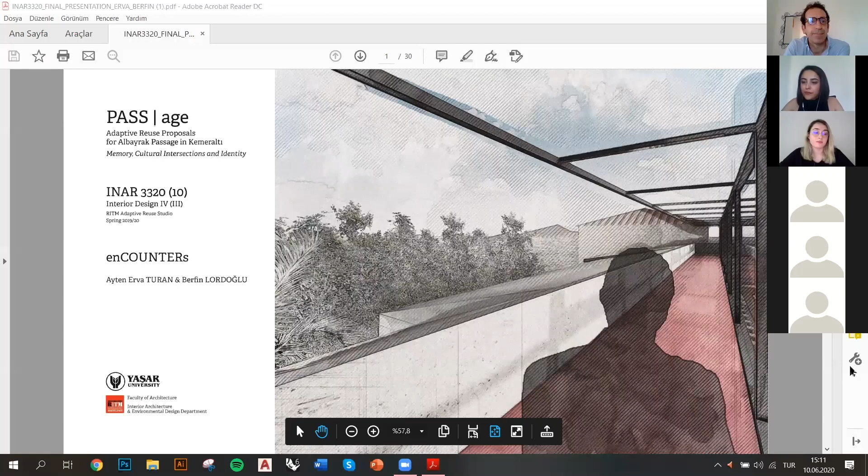As already remarked during the introductory session, one of the greatest values of Albayrak Passage is its urban context and socio-cultural environment. On the southern side of the building is Havra Street, a strategic commercial access for the Kemeraltı District. The major characteristics of Havra Street are its vitality, the intense flavor of local gastronomic products, the voices of vendors, and the constant flow of local and visiting people. On the eastern side of Albayrak Passage is 937 Street, which, compared to Havra Street, is a much quieter and more intimate urban connection.

Here is where a synagogue stands, one of the nine synagogues composing the Jewish cultural heritage cluster of the Havra District, recently restored. The combination of all these elements makes the location of Albayrak Passage absolutely extraordinary and unique. At the same time, the uniqueness of each of the two access points to the building needed to be considered during the evolution of our project proposal.

Our project approached the two entrance spaces of Albayrak Passage differently, relating to Havra Street and 937 Street through different functional and design strategies. Major spaces for social encounters and consumption were located on the eastern side of the building, due to its more intimate profile, with the intention to promote interaction between indoor and outdoor spaces. The major indoor space for social encounters was positioned at the intersection of the two circulation axes, in order to keep untouched the original character of the building threshold located on Havra Street.

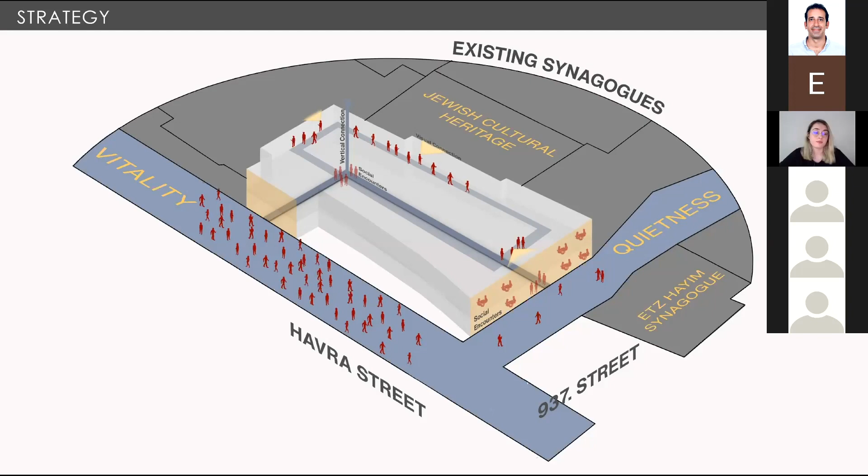The absence of spaces for social encounters in the existing configuration of the building was an important aspect in defining our design strategy. Spaces for social encounters are extremely important for creating a mixed-use program, and they promote experiential goals in social and cultural terms, as well as contrasts such as old-new, stationary-movement, passive-active experience - all relevant intentions in determining the new functional distribution of Albayrak Passage.

The new program for the building includes spaces for gastronomy, informal working, commercial activities, spaces for professional education, all connected by free spaces for social interaction. As previously mentioned, the distribution of these functional areas was achieved through the analysis of the building context and the evaluation of the original layout of the building.

While social areas are generally located in close connection with the building entrances and linked by the major horizontal and vertical circulation axis, informal working areas and commercial spaces are mostly attached to the system of circulation, and social spaces on the Havra Street side due to its great vitality. Centrally, spaces for gastronomy define a new crucial zone where a blend of local flavors reflects the character of Kemeraltı.

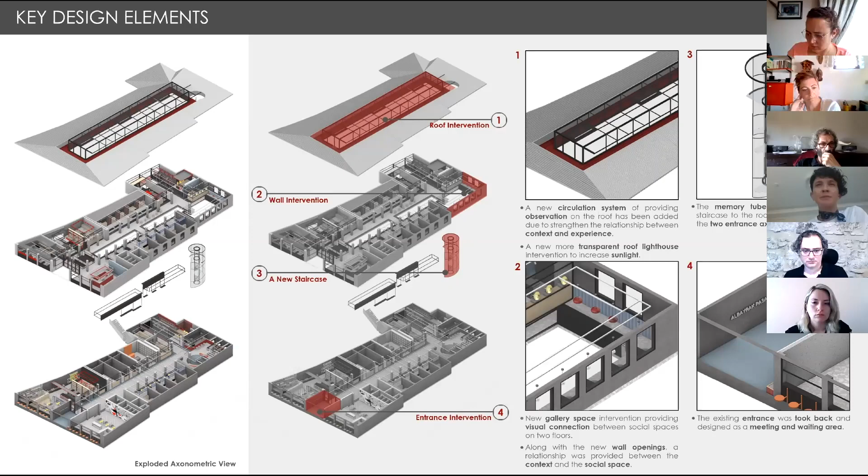The redefinition of the entrance gate located on 937 Street allows the creation of a more protected access point where people would gather or wait for one another.

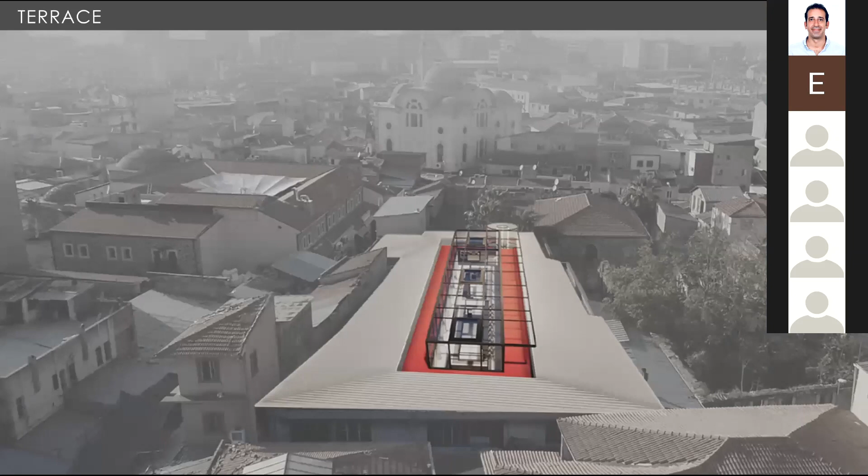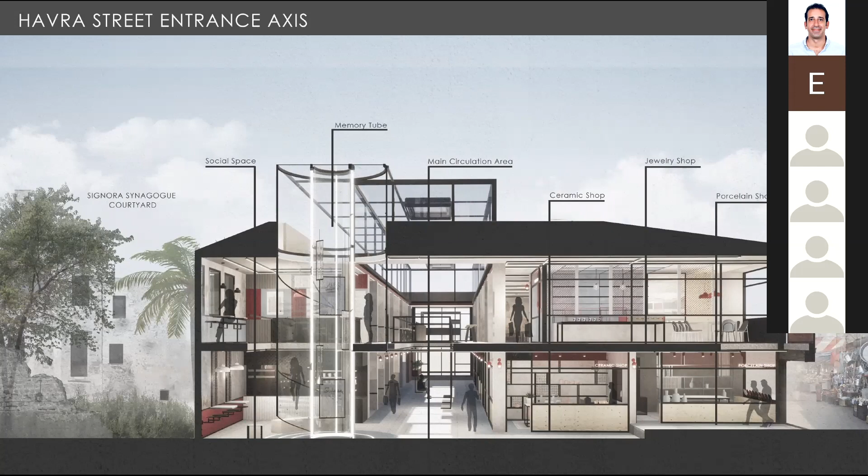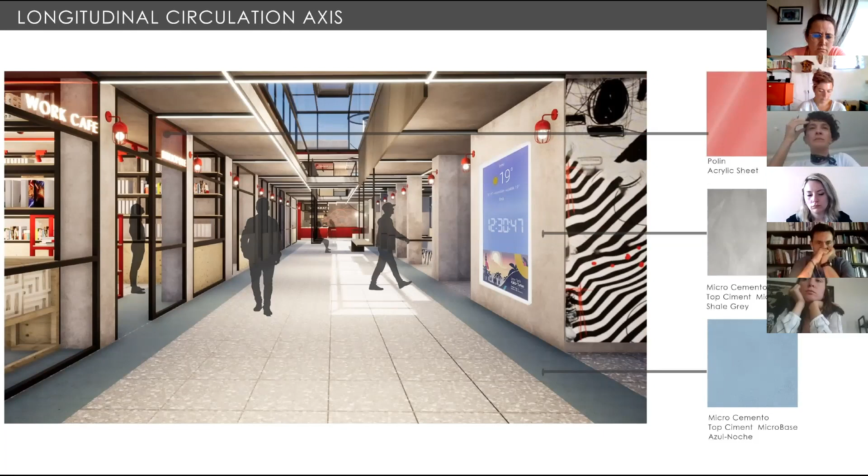This perspective view shows the longitudinal circulation axis in its new design. The character of the space is unchanged, with the lateral position on both sides of commercial and gastronomy spaces. The central gallery connects visually with the upper level and allows natural daylight to illuminate the corridor.

In relation to the materiality, existing terrazzo tiles are retained, but framed laterally with linear contrasting stripes made of colored polished concrete in order to emphasize the edging border between circulation and commercial spaces. The vitrines of the shops are redesigned using metal frames, and all signages are proposed as neon works, composed of light letterings. Five additional metal framed elements create sitting units, marking the verticality of the space.

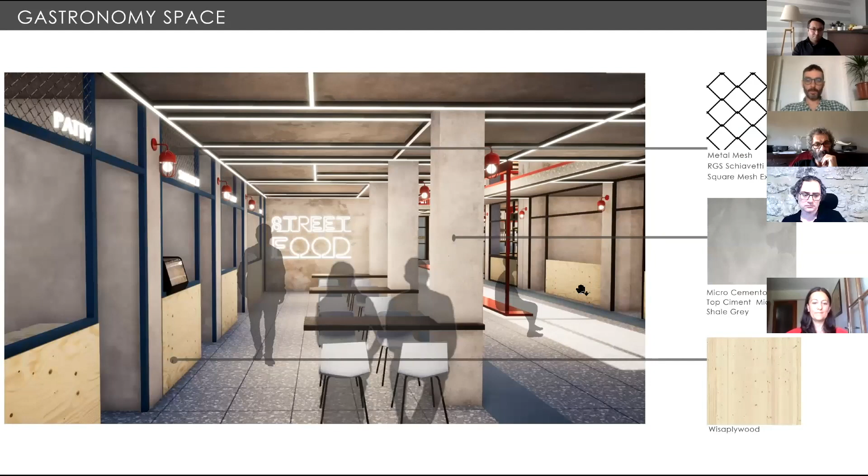In order to emphasize the unity of the space in relation to the gastronomic purpose, we propose the application of artificial lighting linear elements, which ideally link both areas while marking the gradual structural system of the building. Storefronts are here characterized with an additional feature, a metal mesh positioned behind the signage.

Moreover, we don't propose for this side of the building any integration between outdoor and indoor spaces, apart from the entrance gate.

This perspective view shows the circulation axis starting from the Havra Street entrance gate in its new design. As previously mentioned, we intend to locate on this side of the building a sequence of commercial activities, reproposing a pattern of artisan shops typical of the Kemeraltı region, but with a new design appeal.

The contrast between grocery and food shops generally characterizing Havra Street, and artisan shops located at the entrance of Albayrak Passage, would reinforce the shift in the commercial character of the building.

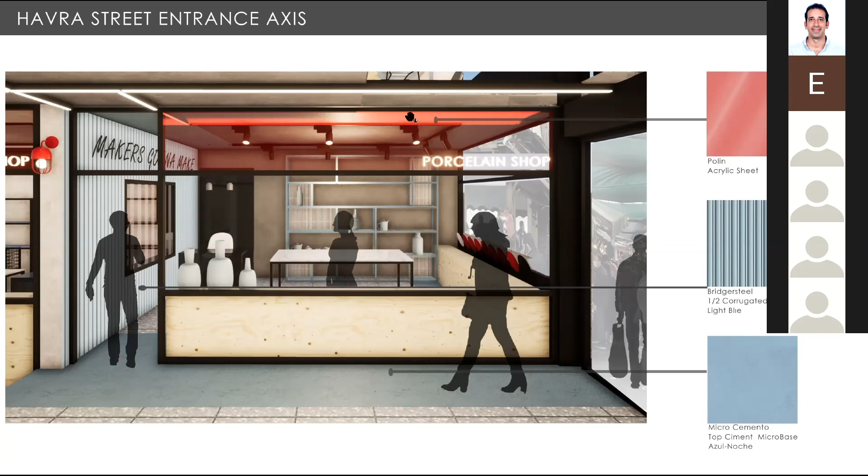Here is a sample, a porcelain shop. And here is the opposite view with a different commercial space for glass products.

This perspective view shows the intersection between the two circulation axes of the building, originating in 937th Street and Havra Street. The project proposes the creation of an indoor plaza, a space for social encounters and consumption, a strategic indoor meeting point for the visitor, and the initial point of a vertical journey which connects the ground level and the first level of the Albayrak Passage by a new stairway, designed as a vertical glass tube.

A gallery surrounding the stairwell connects visually both levels of the plaza.

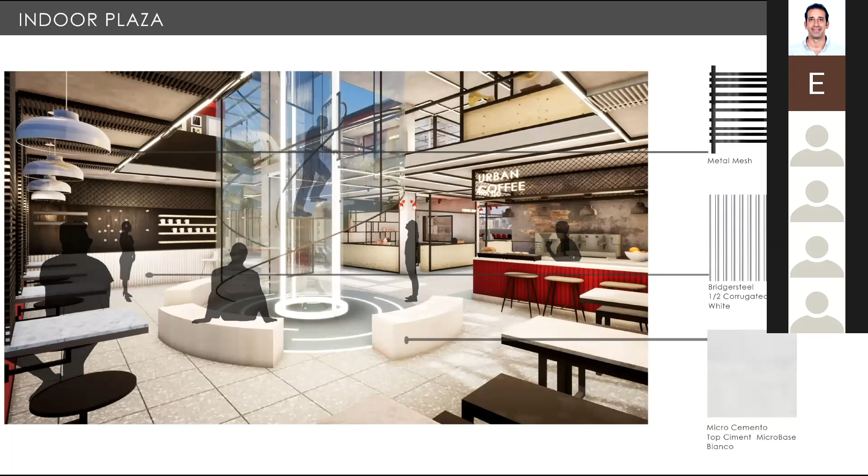Here is another view of the plaza, where we can identify this intersection point of the two main circulation axes at the back, the cafeteria on the left, the glass cylinder connected with the upper levels, and the gallery around it.

In this view, you can see the arrival point of the new stairway at the first floor level. The large gallery space surrounding the cylinder is here framed by additional spaces for social interaction and informal working areas. Large openings visually extend the indoor spaces across the boundaries of the building, allowing the view toward the buildings composing the Jewish Cultural Heritage Cluster.

This render shows the main circulation axis of the building on the first level, visually connected with the lower corridor through linear gallery spaces and highly naturally illuminated through the linear skylight enclosing the space from the top. Here again, spaces for gastronomy are located on both sides of the axis in combination with other commercial spaces.

The project intends to increase the quantity of common spaces on the first floor in order to promote higher visitability and longer permanence of visitors. You can see the main circulation area of the first floor, roof, lighthouse, and skylight on it.

The railing design, created of planes and lines working as a table and sitting units, has been inserted into the gallery spaces, giving a quieter character to this level and a higher degree of brightness.

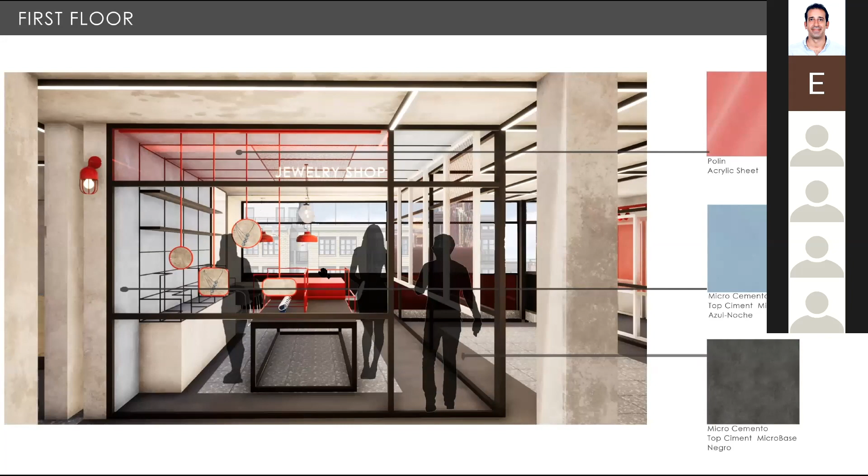Artisan shops are located on the first floor as well. Here is a sample for handmade jewelry products. And at the back, large openings visually connected with Havra Street.

This perspective view shows how spaces for gastronomy are arranged along the longitudinal axis of the building on the first floor, similarly to what is proposed for the lower level, by recessing the storefront of the existing commercial units.

Here is one more cafeteria space located on the first floor and visually connected with 937th Street, in continuation with the character of the building on its eastern side.

As mentioned during the introductory session, Albayrak Passage was previously characterized by the presence of shoemakers. The project intends to retain the memory of shoemakers by proposing the integration within the building program of space for professional education related to shoemaking and accessories, a sort of permanent workshop where interested users would gather to acquire new professional skills, in addition to already existing public programs for professional education located in the city of Izmir.

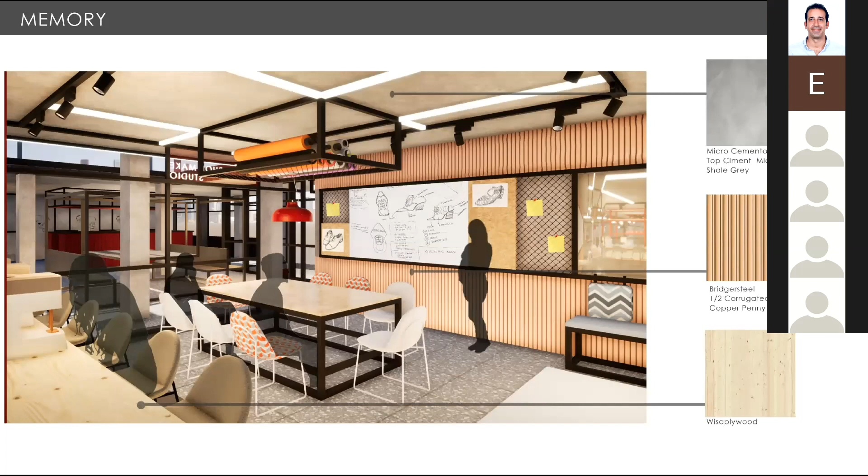This closing slide shows a view of the terrace level. And here is where our journey throughout our project proposal ends.

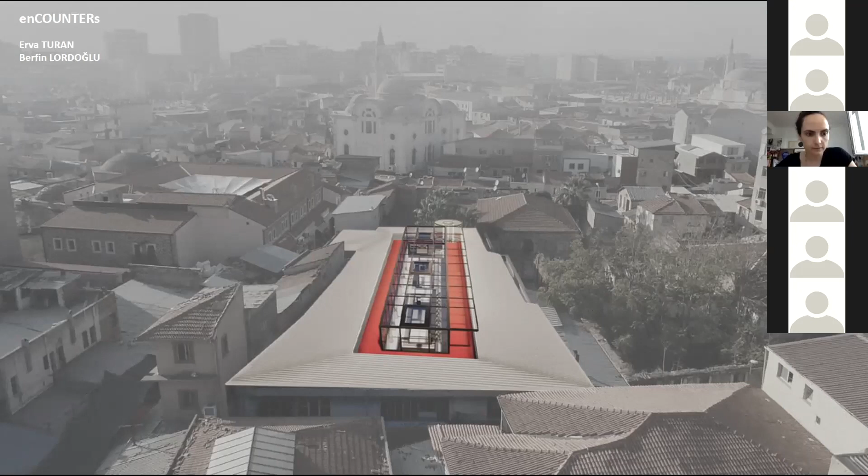Okay, we considered it just as an observing point, seeing the synagogues around here and making the visual link between the user and the urban context. So we just want to add a new circulation system, a third one, so they can observe the context. This function does not exist in the current situation of the passage. We added a new value like that.

Actually, I also found it a very interesting contribution of yours to the building. And now, after this question, quickly my comment would be — I think it even promises more. Therefore, I asked the question.

My quick suggestion would be: what they see from that viewpoint — we can already get a grasp of it from this render. But I would suggest you also depict, maybe with a render or any kind of illustration, showing us the kind of life there, what's going on there. Because in my opinion, it promises much more than just being a viewpoint.

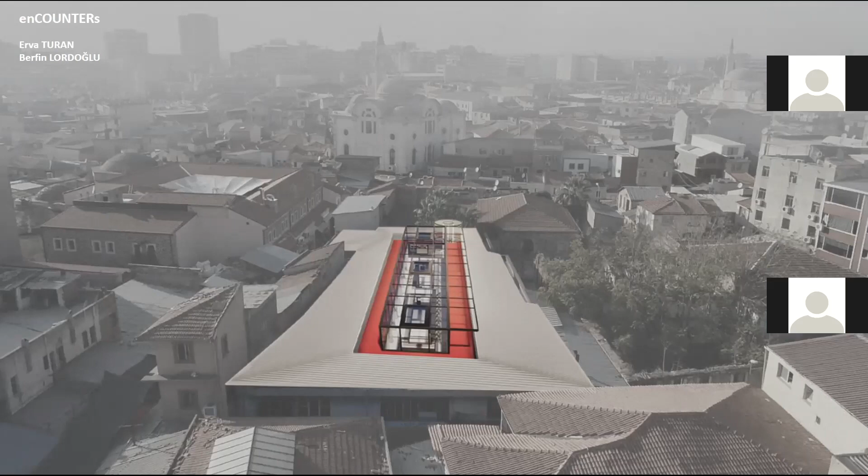And in fact, designing this building in real life, we have these ventilation or sunlight problems in real life. We are planning to put, unfortunately, the air-conditioned units around that terrace circulation area because we don't have any other place. And the openings on the roof walls, the original ones, are so important. I don't see those in this design to ventilate the building naturally, and that's another issue, up to me.

That's all from me at the moment. Thank you, thank you for your comments.

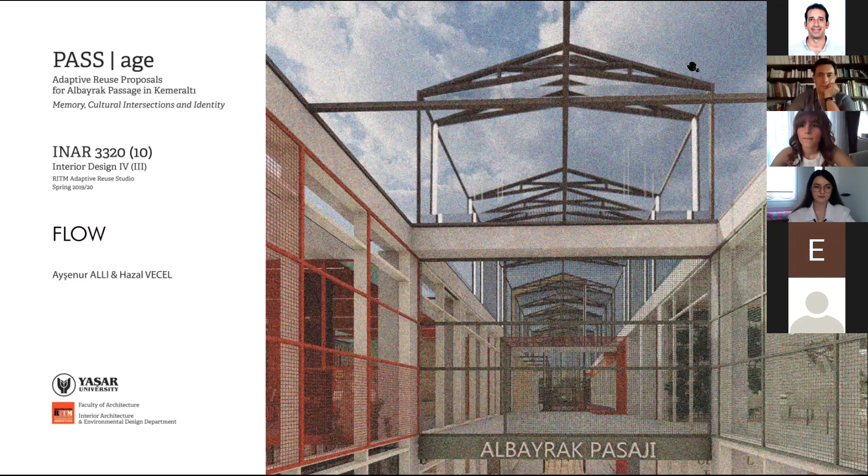As already mentioned during the introductory session, Kemeraltı is the heart of the city of Izmir. It is a large open-air bazaar offering a great variety of diverse experiences for shopping, gastronomy, and culture. In this slide, we also wanted to mention once more that our project site is unique, given the fact that Albayrak Passage is surrounded by a cluster of Jewish synagogues, representing an extraordinary heritage value for the building itself.

Our approach for the project addresses all these contextual values, and it aims at creating an urban hub where traditional craftsmanship, culture, and innovation will merge and contribute to the revitalization of the old shoemaker's passage.

The idea is to highlight the character of the building and urban passage through the creation of two main experiential roads within it: one consisting of artisan shops, and the other representing a journey through the culinary history of the area, characterized by the intersection of diverse cultures. These two roads will promote a new flow of people and experiences in total continuation with the existing dynamics of Kemeraltı.

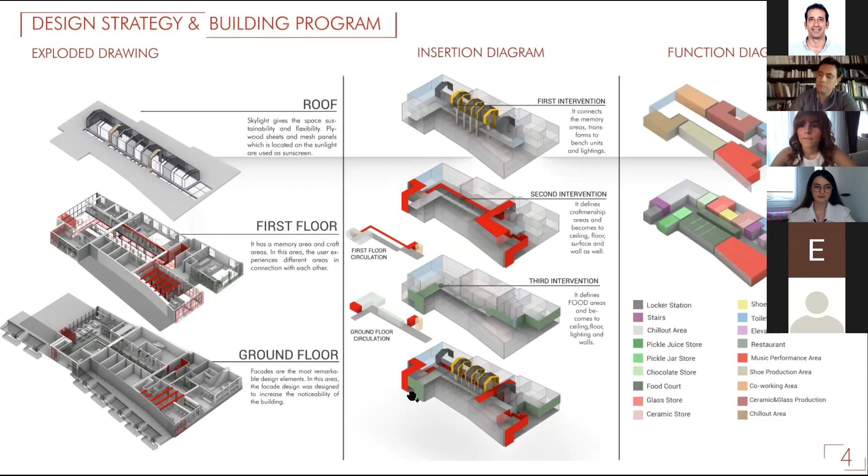Here is the axonometric view of the ground floor, showing the two entrance gates from Havra Street and 937th Street, linked by the L-shaped passage corridor running as the spine of the building. The diagram also indicates the variety of functional spaces distributed on both sides of the spine, and major areas for cultural, gastronomic, and social experiences.

You may notice a large open space visible on the left corner of the building, an area we have named the core. That is the major social space proposed by the project, able to gather a large number of visitors while establishing a great visual connection with the hidden garden of the Synagogue. On the bottom corner, in close relation with 937th Street, the project proposes the integration of a special space for culture and music. We will present these two areas later, together with a special proposal for the passage.

Here is the axonometric view of the first floor, where again a combination of cultural activities and informal working are distributed with the same strategy, based on the alignment of functions along thematic flows indicated in red and green as well.

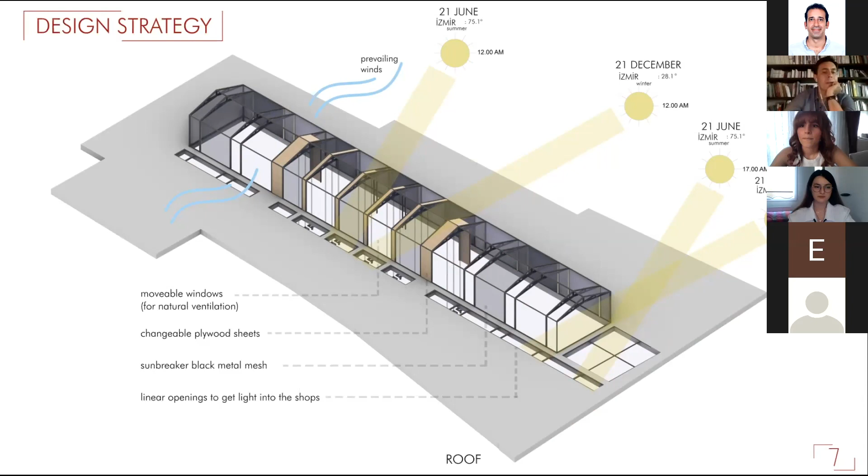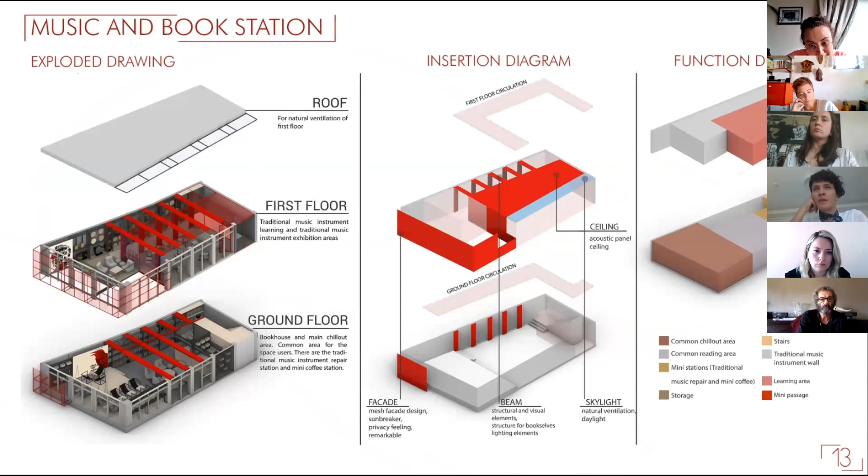Now we are going to present in detail our proposal for the music and bookstore. With the help of three different diagrams, we want to highlight all relevant architectural, interventional, and functional aspects of our proposal, including the facade scheme, the distribution of spaces among different levels, and special features characterizing the design proposal.

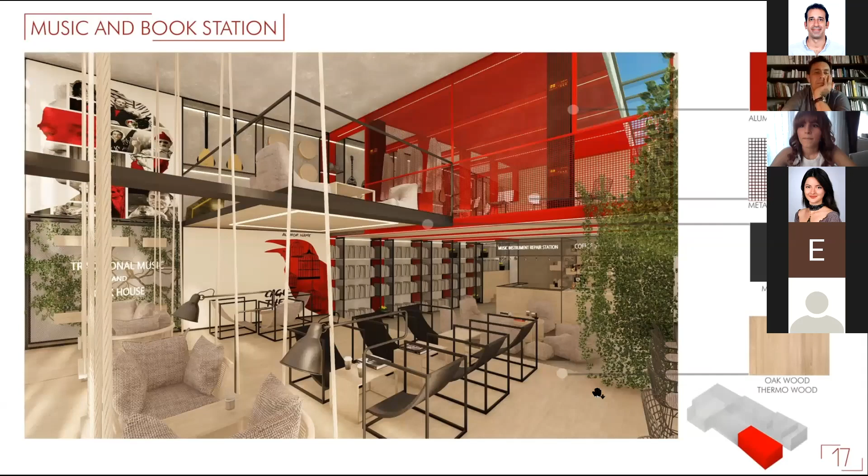This is the first of four internal views of the music and book space. This perspective shows the ground level and the reading area having a double height and therefore totally connected with all other spaces composing the music shop.

Now we want to talk about another important proposal of the project, the one envisioning the redesign of the central corridor of the building, the passage, the major characteristic space of Albayrak Passage.

With the help of three different diagrams, we want to highlight all relevant architectural, interventional, and functional aspects of our proposal.

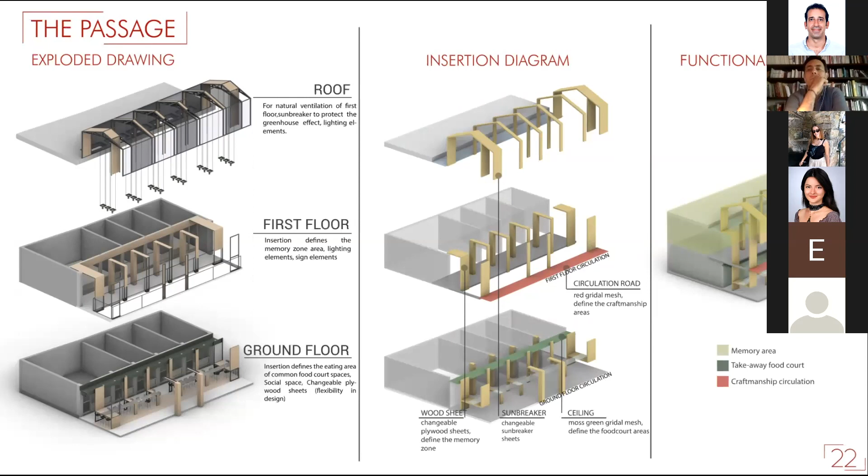Proceeding from the lower to the upper level, a combination of vertically organized elements creates a space for consumption and social interaction on the ground floor, a new circulatory system on the first floor with the aim of emphasizing the shoemaker space and the relation with the memory of Albayrak Passage, and the redesign of the skylight structure on the roof level.

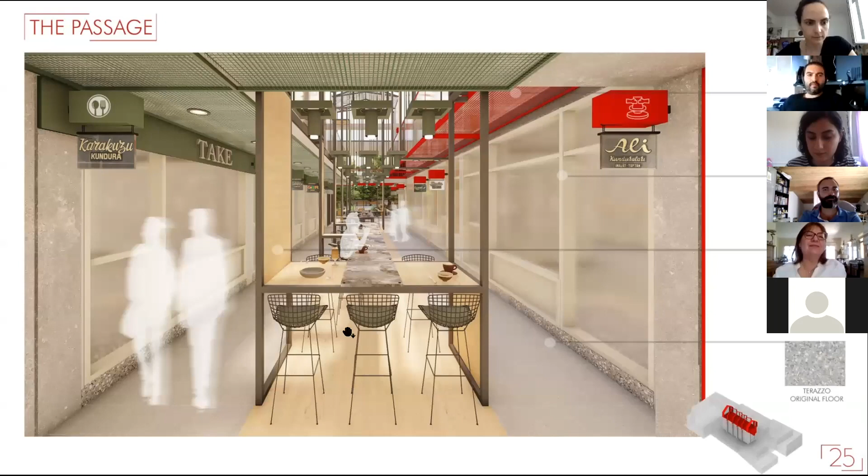Here is a view of our proposal as visible from the passage of the building in its longitudinal alignment. On the right side, a sequence of artisan shops, and on the left side, several spaces for gastronomy. In the center, a linear horizontal plane serves for short-term consumption of gastronomic products and social interaction opportunities, marking the characteristic linearity of the building and greatly illuminated from the skylight. The verticality of the space is also emphasized.

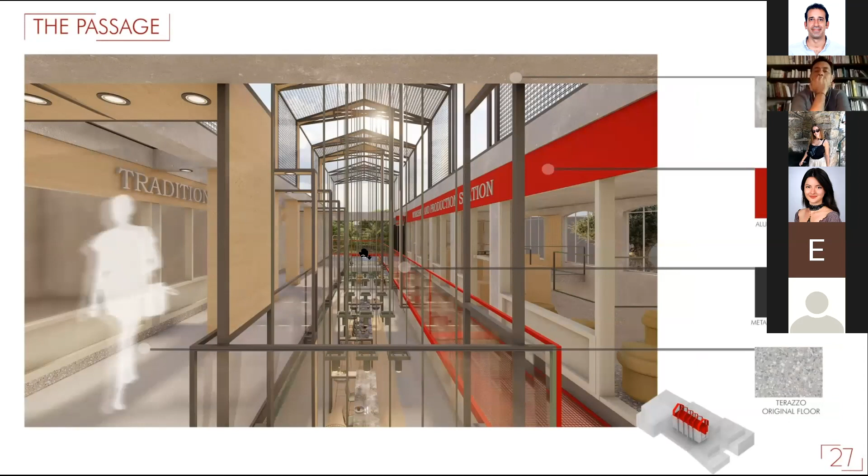Here is another view from the first floor, where the proposal of a new solution for the walkway made of steel mesh panels is visible. The intention is to promote a greater perception of the physical relations among the different levels of the building.

Now we are going to present our last major proposal, which is the core. In order to describe the relation of the core with the building entrance, we want to start our journey from the access point located on Havra Street.

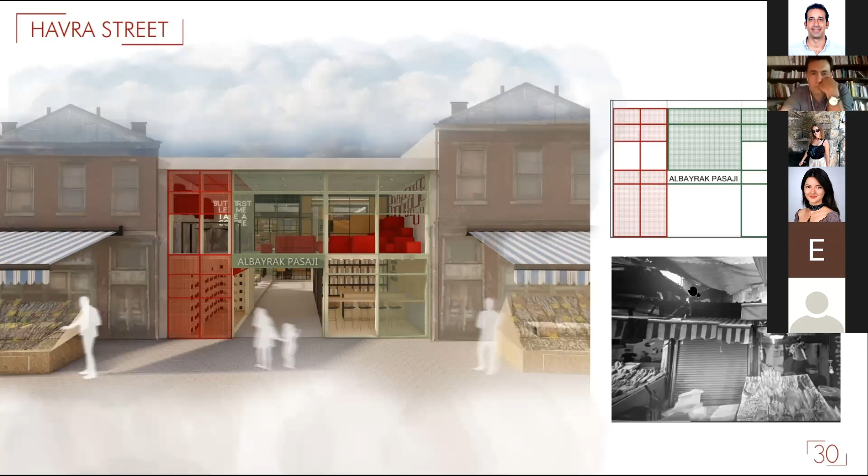The elevation of the building expresses the same language proposed for the other building facade, 937th Street. Here again, we propose a new lightweight skin made of steel mesh panels, colored in red and green as well, somehow interrupting the character of Havra Street and therefore marking the presence of Albayrak Passage, a sort of interpretation of the fabrics utilized in the city bazaar as permeable shading devices. They are applied vertically on the building facade.

Here is the view from the entrance gate showing the locker station on the left and a local gastronomy products shop on the right.

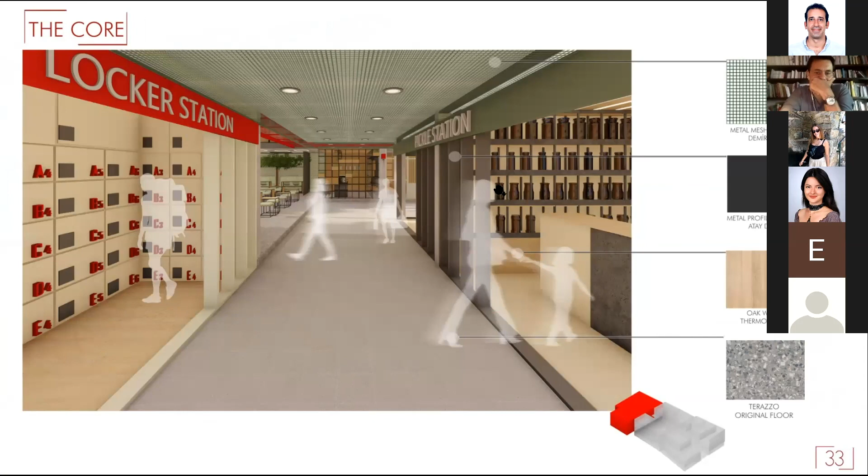Okay, and also we were inspired by the style of deconstructivism, that's why we also chose the red color. You combine it with deconstructivism because red and green, in my opinion, relates to color theory - it's the 50%, in my opinion. I don't remember exactly, but I studied it in the past. Red and green are 50% of the same - I think this equals the combination of that, for example it's a contrast of colors. For example, 50% red and 50% green is similar if you put it on heavily. But if you choose, for example, blue and yellowish, or violet, 30% yellow is equal to 70% of the other. So you could divide the space by functionality - 50% green, 50% red. And for constructivism, for me, more yellow, because yellow, in my opinion... because also red is not a bad color for deconstructivism, but...

Just a question - I think the real answer is they are from Karşıyaka. That's why I didn't want to say it. They both live in Karşıyaka. They wanted to give a Karşıyaka touch to the building, and they put it inside the city of Göztepe. It was a big problem - now people connected from other cities don't know what Karşıyaka is. But anyway, it's the other side of Izmir, the other side of the bay, and they have a typical color, red and green. So please tell the truth - it's not about natural colors. We are from Karşıyaka. Yes, so this is the truth, that would be the answer.

You caught up, Sergio. No, I'm kidding. It's just sometimes we need a mental break. Anybody else wants to address anything?

If I may - yes, sure, Serkan, please. First of all, thank you very much for making me part of this wonderful group of people. It was a pleasure to listen to the presentations before and now as well. Both presentations, I enjoyed the process of development, the architectural language they created, and especially with your project, the use of light and the greenery also grabbed my attention. The outdoor patio area, the plaza area that you created, is also a wonderful space to be in.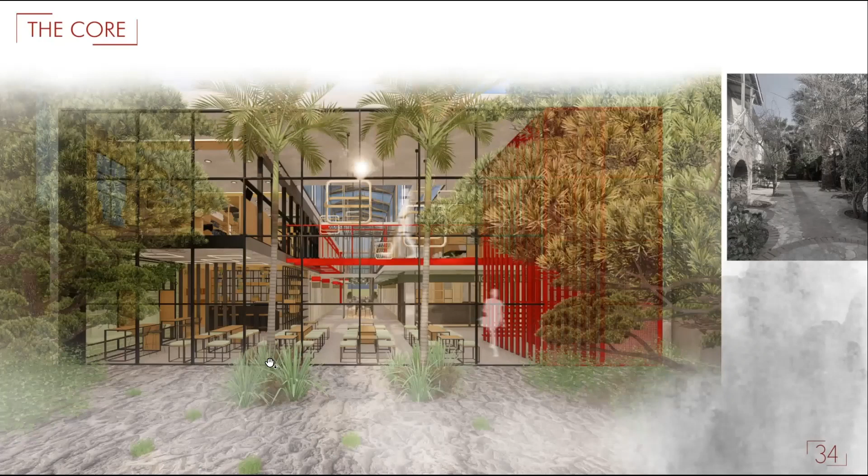Yeah, actually we thought about it before, because Kemeraltı is a very historic place, and we were trying to design a modern place here while also integrating with Kemeraltı. That's why, as I answered before, Serkan Bey, we were trying to keep things simple. Also when we were traveling in Kemeraltı and talking with the esnaf workers there, they always told us it's too boring for them because they're used to going to the same places every day. That's why we want to make new things combined with the traditional things as well.

Yeah, we are trying to combine two things actually, but I don't know if we can show it. We also put the craftsmanship and the food courts at the same place, because people come here to get something, to eat something, and they can watch the craftsmanship and connect with the tradition as well. That is our logic while connecting the past and the new - these are key points.

Yes, I obviously understood all these craftsman ideas and how to integrate them, but I think the collages are maybe too clean - they seem too modern. Maybe not modern, but if you even put a real person into that collage, into that graphic language, it would completely change, I think. So it wouldn't be that clean.

I think you have the idea and the design, but when the graphic is too clean, I question things like that. Even in the image showing the neighboring elevations of the buildings, the graphic was really clear cut. Maybe not a white person, but a real person. I don't know, it's your graphic language, but I think you have the idea, though showing it was a little bit missing. That's why I asked, but thank you for the answer and congratulations for the nice project.

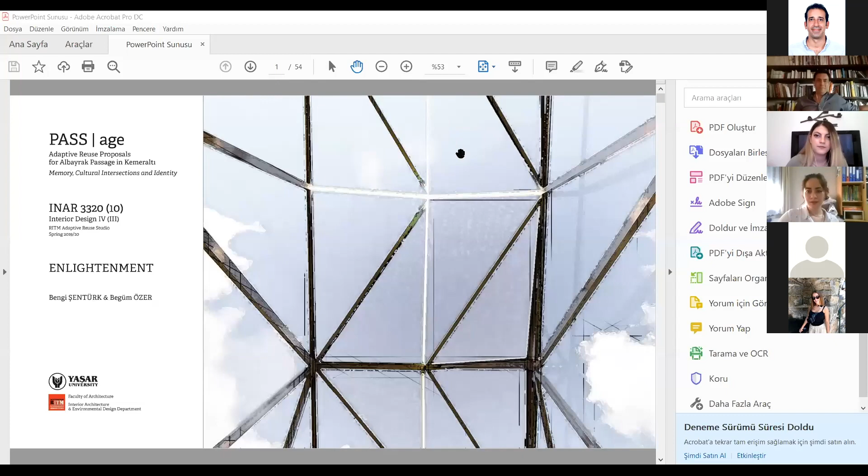As already remarked during the introductory session, one of the greatest values of Albayrak Passage is its urban context and socio-cultural environment. The building is located in Havralar District, which in Turkish indicates the region of the synagogues. Moreover, the building is located in Kemeraltı, the old bazaar area of Izmir. Symbolically, Albayrak Passage, by losing its original function and commercial purpose, had remained in a dark spot for a long while, yet it is surrounded by an invaluable cluster of cultural heritage. Our proposal is to bring the building back to light and to recreate and extend its original character as an urban and commercial passage. Our project title emphasizes this intention. The transition from dark to light is actually an enlightenment process in which both the historical texture of the region and the building itself are revalued.

Sinyora Synagogue, one of the synagogues composing the Jewish cultural heritage cluster, directly abuts Albayrak Passage on the northwest side of the building. The courtyard of the synagogue represents a valuable focus for a visual connection from the inner space of the building. Therefore, a consistent architectural intervention was proposed regarding the northwest elevation of Albayrak Passage and a portion of its roof, creating a continuous three-dimensional transparent volume enclosed by vertical and horizontal glass screens, allowing wider integration of views beside and above the surrounding buildings and open-air space composing the Jewish Cultural Heritage Center. In this way, the rehabilitation and redesign of the skylight structure of Albayrak Passage becomes a major key design element of our proposal. This intervention materializes the potential of the building and increases its contextual value by creating an observation point above Kemeraltı and the Jewish Cultural Heritage Center.

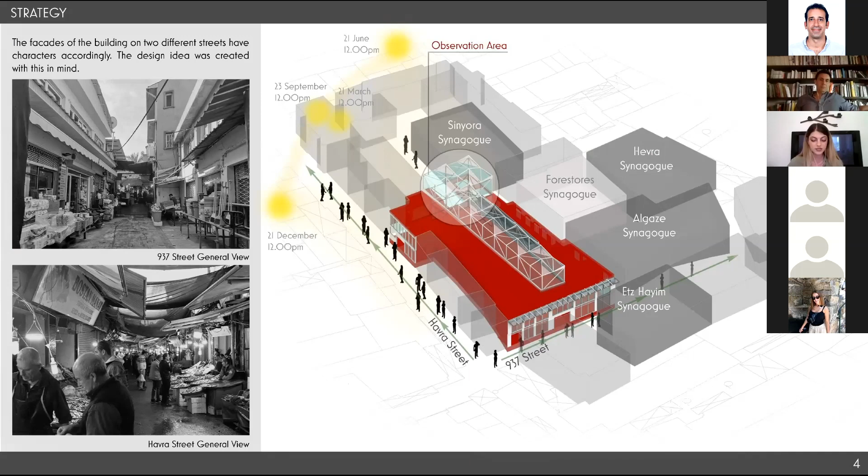As previously mentioned, Albayrak Passage is a commercial building. It represents a symbolic threshold between Havra Street and the Synagogue district due to its location. Two separate access points allow entrance into Albayrak Passage, located at both terminals of the L-shaped indoor passage. These two entrance gates have different character due to being located on streets with different urban characteristics. Havra Street is a vital and dynamic urban axis, constantly filled with people and having a strong commercial character. 937th Street is a side connection, much quieter compared to Havra Street, which in the near future is supposed to become a strategic pathway to reach the Jewish Cultural Heritage Center. Therefore, our project intends to treat both elevations of Albayrak Passage considering these two different scenarios.

Albayrak Passage was built during the early Republican period. It is characterized by the typical grid composition of the facade with large openings. The project intends to propose minimum modification of the original composition, with only the addition of a shading element framing the facade on its upper edge. This perspective view shows the eastern elevation of the building along 937th Street in its proposed configuration. Similarly, this perspective view shows the southern elevation of the building along Havra Street in its proposed configuration, redesigned using the same language as the larger elevation previously presented.

As mentioned earlier, the building is characterized by the L-shaped central passage. Several decisions were made in relation with this characteristic configuration of the layout. The first is to strengthen the passage character of Albayrak building by locating a new social space at the intersection of two axes, with the vertical extension of it in the form of a glass volume that integrates a large portion of the roof. At the arrival point of the major vertical circulation road is the external terminal of the building with the observation terrace.

Another important decision was to protect the commercial character of the inner passage by locating the majority of shops along the central corridor and the ground level, which are supposed to include space for gastronomy and artisan shops. On the right side, you can see how the distribution of all spaces composing the building program are arranged, with the indication of gastronomy areas, shopping areas, educational workshop areas, and shoemaker memory spaces, all linked to separate social spaces distributed on both levels of the building.

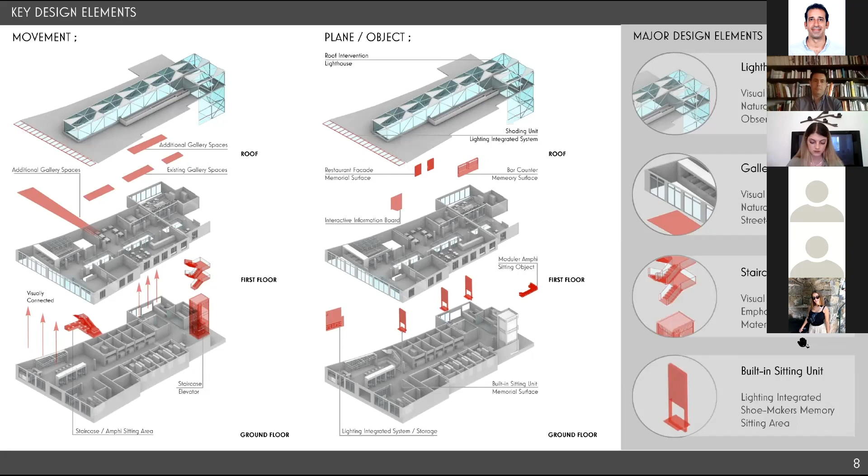The section also shows our draft proposal for the redesign of the skylight, and besides it, on the right side, it is also visible a linear terrace open on the northern side and overlooking the Jewish Cultural Heritage Center. The terrace represents the outer extension of the inner space and additional space for small events and social interaction.

In central position, white metal frames marking the verticality of the inner void of the building create seating solutions and communication surfaces.

On the left side, the section shows the new stairway connecting both levels of the building and ending upward at the terrace floor. The stairways open up upon the major social space in the building, located in the northwest area of Albayrak Passage and surrounded by glazed partitions allowing views towards the courtyard of the synagogue.

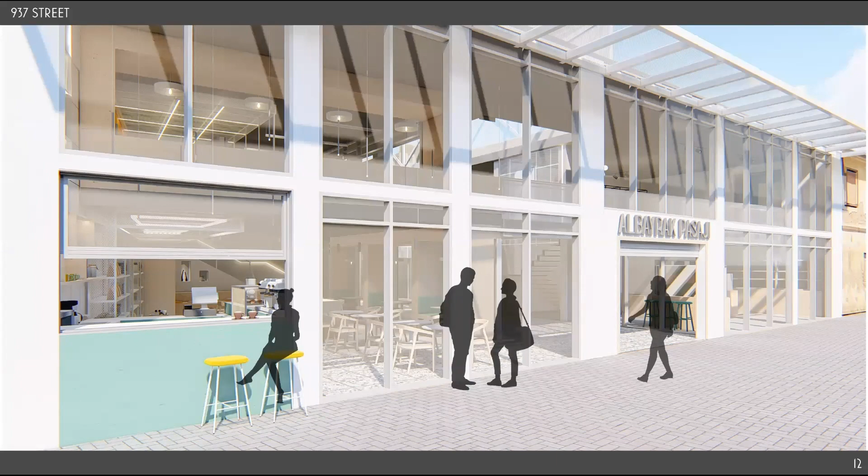This perspective view shows the gallery we decided to create on the inner edge of the building along 937th Street. The gallery connects visually both levels of the cafeteria on the eastern side of the building, doubling the height of the space and increasing the quantity of daylight in this area.

The commercial character of the passage is protected. A combination of artisan shops and spaces for gastronomy is distributed along the major axis of the building, where storefronts are visibly designed by keeping the general composition of the inner elevation. All signage elements have the same character to unify the aesthetic of the passage.

This render shows our proposal for the introduction of white metal frames enclosed with white metal meshes, emphasizing the verticality of the central gallery of the corridor by providing seating solutions for the visitors.

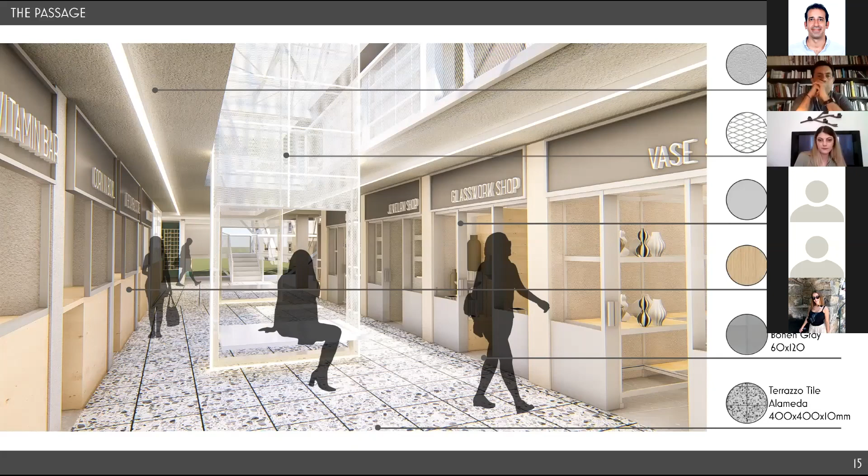This render shows the intersection point of two internal circulation axes of the building, where the project proposes the creation of a large common space for social interaction and small events, all surrounded by a new glass facade system, opening up the inner space of the building toward the courtyard of Signora Synagogue.

An elevator is here proposed in order to connect all levels of the building, with the inclusion of the new level suggested by the project, that is the terrace floor.

And here is the proposal for the redesign of the central circulation space of the first floor, characterized by new balustrades. On the right and left side, a sequence of spaces for gastronomy is visible, with the inclusion of an educational space as well for cooking classes.

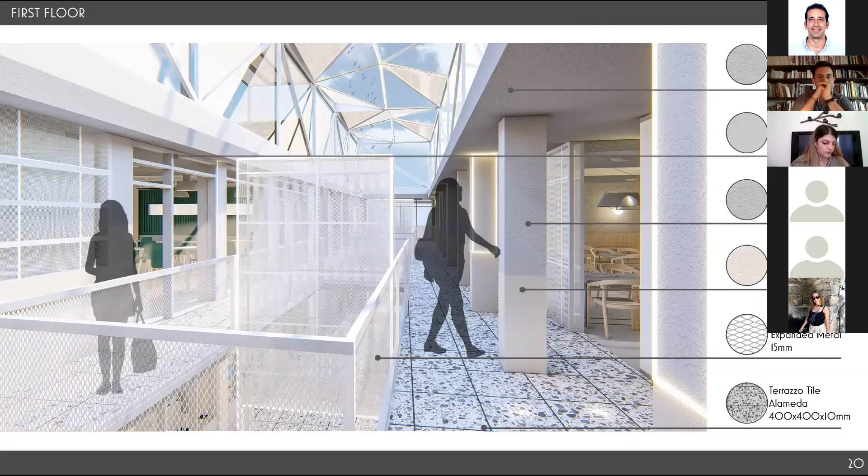And here is the proposal for the introduction of a new floor level aligned with the original roof of the building and reachable via stairway and elevator. This level will allow the view above Kemeraltı and the Jewish Cultural Heritage Center, creating a new vibrant experience for the visitor of Albayrak Passage.

And here is a night view of the first floor circulation space, showing how lighting elements are integrated with the structure of the skylight.

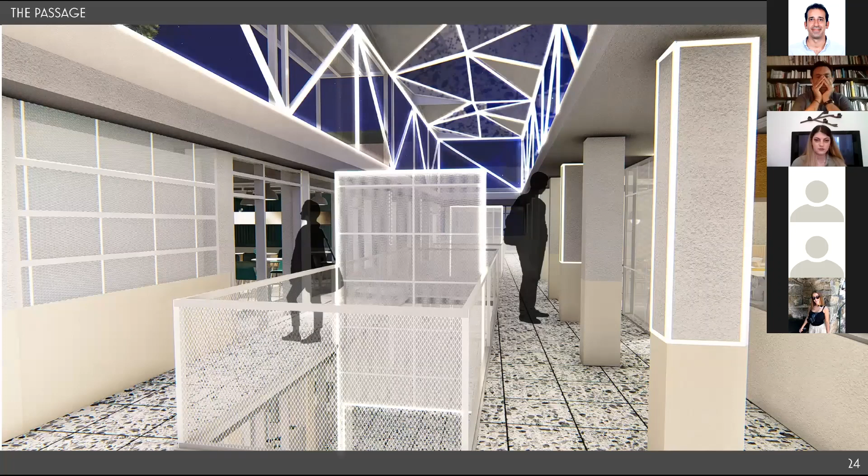Now we want to have a more detailed description of some relevant spaces of Albayrak Passage, especially in relation to the proposed materiality. We will start from the 937th Street side, where our co-working cafe is located.

As already mentioned before, the project proposes the creation of additional gallery spaces in order to modify the spatial character of this area and to connect visually both levels of the cafe. The cafe is also directly connected to a new stairway, where a spatial area for social encounters and a memory wall are complementary key design elements of the design proposal.

This slide shows the material selection for this space, complementing original materials with new ones having a similar chromatic character.

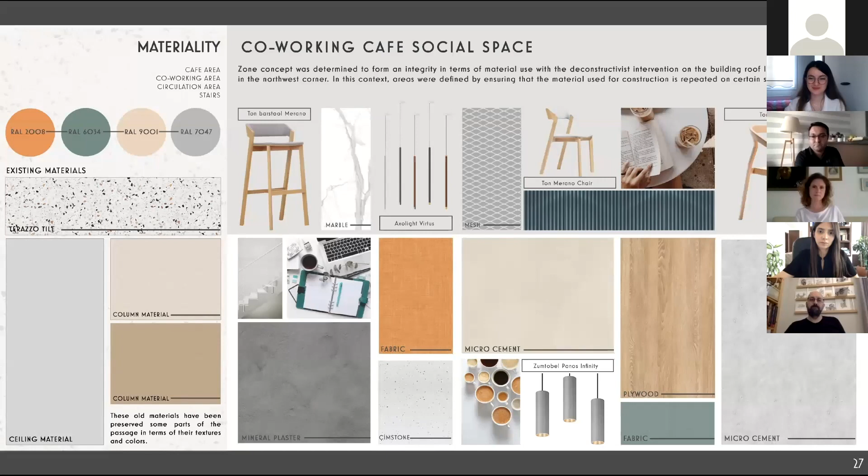And here is the scheme of the upper floor of the co-working cafe, where different informal working solutions are offered with the inclusion of a spatial area for workshops, chromatically emphasizing orange. The linear gallery space connects visually the ground and first floor, allowing large views above 937th Street.

On the right side, you can see the vertical circulation elements, the stairway connecting the two levels. On the ground floor, beside the stairway, an additional common space for informal gathering is integrated into the design of the new vertical circulation system.

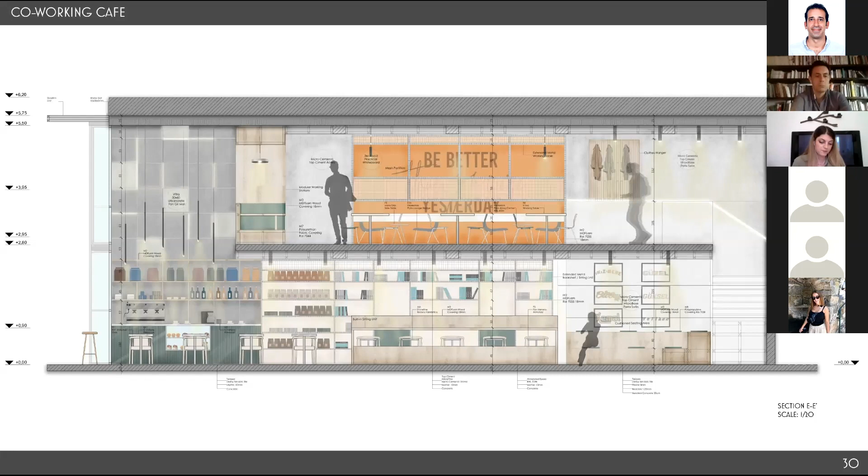And here is the relation between the co-working cafe and 937th Street, with the possibility to serve beverages directly on the street side.

Here, the vertical continuity of the background surface of the counter is obtained with a combination of ceramic elements and lighting devices screened with white metal meshes.

And here is one more perspective view of the ground floor level of the co-working cafe, showing the general materiality of the space and seating solutions, offering a wide range of informal working solutions and social interaction.

Here is a close-up on the vertical circulation areas, where an informal gathering tribune is arranged. On the walls, original shoemaker shop labels are exhibited with the intention to integrate memory into the design of the space.

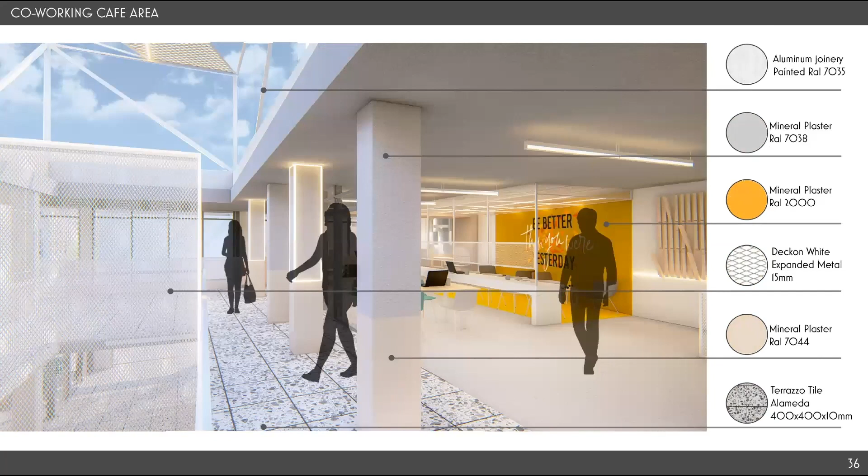And here is a view of the upper level of the co-working cafe, directly open to the central circulation area of the building. The special area for workshop is here visible with its yellow chromatic finishing. And here is a close-up of the workshop area of the co-working cafe.

The second area we wanted to present in a more detailed manner is a large social space located at the intersection of the two main circulation axes of the building, in closer distance with the access gate from Havra Street. As mentioned before, this is the main gathering point for the visitors of the passage, representing the start step of the vertical experience that links all floors of the building and ends up at the terrace level.

We have decided to name the system of all these spaces arranged vertically as the lighthouse.

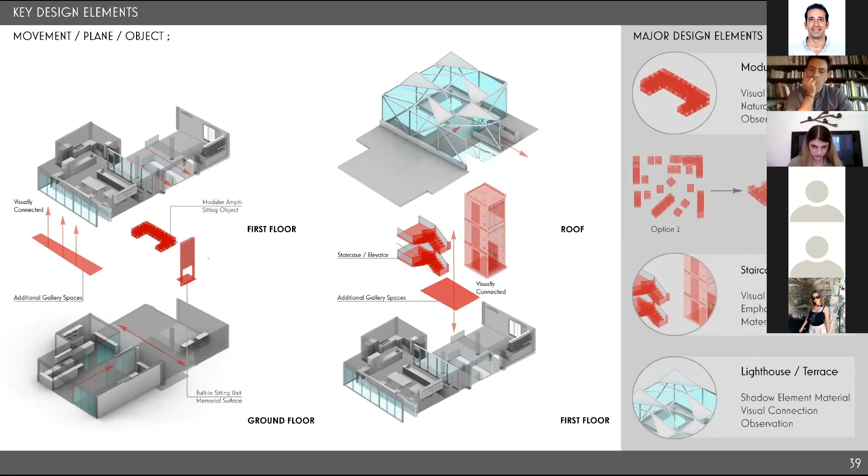Starting from the entrance gate of the building, the project proposes the extension of the existing gallery space. Moving towards the intersection point of the building access, a system of social space and vertical circulation elements is created from the totality of what we have defined as the lighthouse. The materiality of this space is resolved by ensuring a similar language with the building.

Here is the three-dimensional scheme of the area, showing the distribution of spaces on the ground level, including a series of social spaces.

And here is the three-dimensional scheme of the area, showing the distribution of spaces on the first floor level, where a large educational workshop and cooking class is located, visually connected with Havra Street. Here is also visible the extended gallery space on Havra Street's inner edge, dissolving the building access area with a similar spatial solution as described for 937th Street.

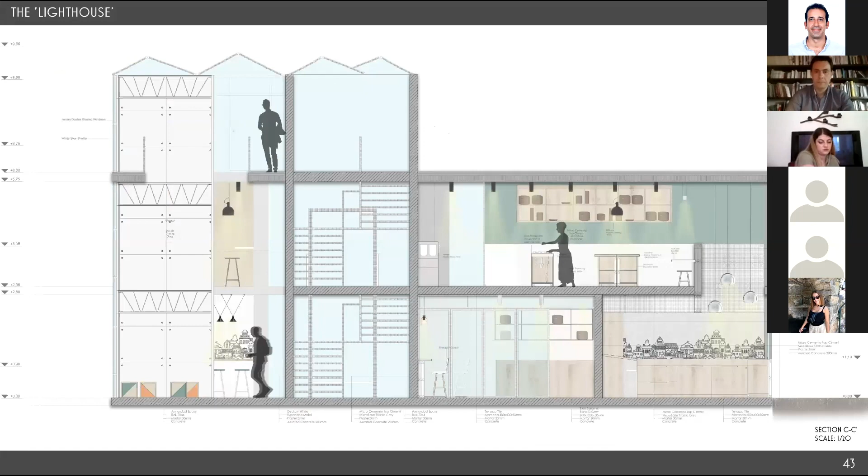This section shows the organization of spaces, both the ground floor and the first floor, with the inclusion of the new terrace level. Here we can see the education space for cooking classes located on the first floor.

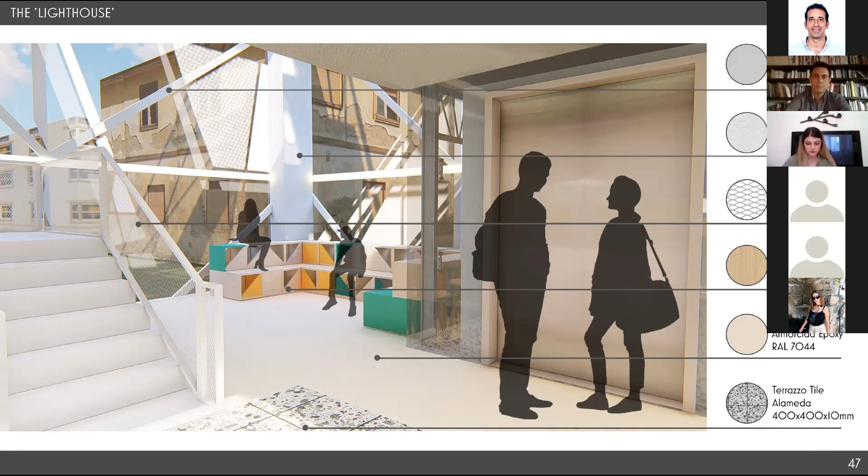Here is the first floor of the lighthouse with a view above the gallery space.

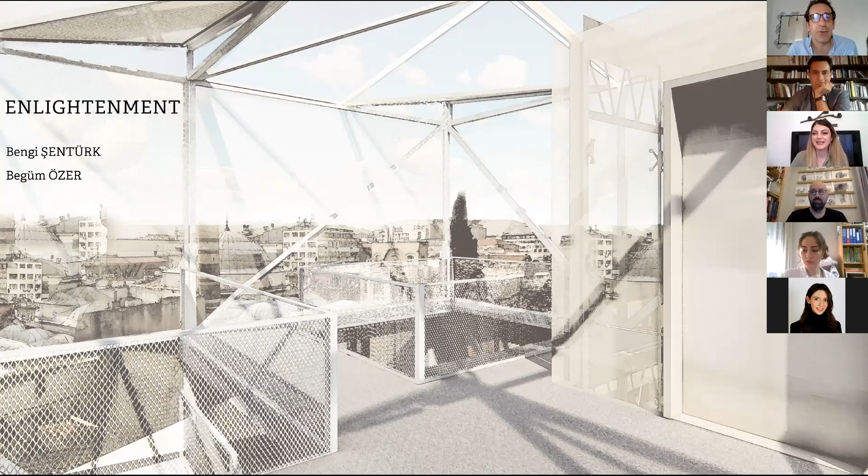My microphone, sorry. Okay, sorry, I didn't read that. So Hector is saying that there might be some inspiration for you to have a look at this project, ABC Museum, and he also mentioned opacity.

The opacity, yes. We try to make this part transparent because this is an intersection point, and it also gives a characteristic feature, which is a circulation axis on the building. So we try to emphasize this area by making it more transparent, to create a visual connection with Signora Synagogue courtyard, and also all around the building.

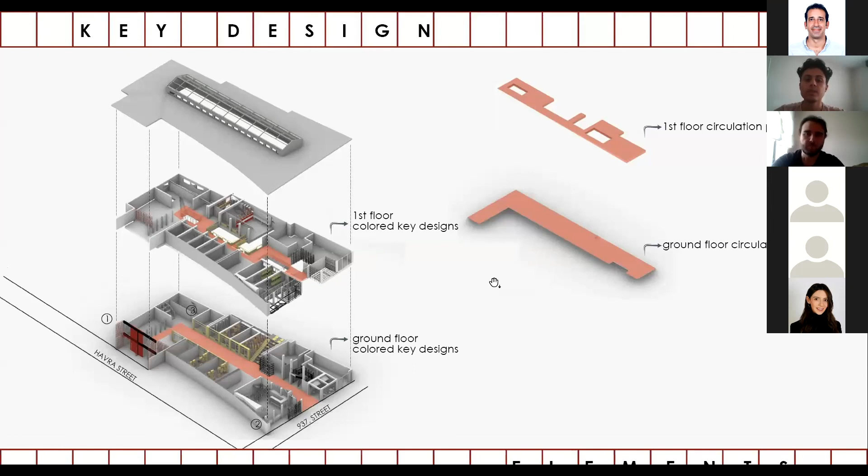Here is where we want to introduce our design strategy. Simply, the project proposes an interpretation of the character of Kemeraltı streets, a variety of patches for the implementation of a series of interventions aimed at introducing new elements, characterizing either the outer appeal of the building in its facades and street relations and the interior space, while proposing the protection of the original passage, atmosphere, and aesthetic character.

This diagram shows the key design elements proposed by our project with regard to the building elevations on Havra Street and 937 Street. It also shows a relevant proposal for the integration of a strategic space for social interaction located along the major circulation axis of the building. We will see these elements in detail in the following slides.

Here is the diagram of the ground floor, where the recession from the street borders characterizes either the proposed solution for the redefinition of the building facade on Havra Street and the one on 937 Street. This solution intends to create a buffer space on Havra Street to allow a sort of detachment from the chaotic character of the commercial axis. On 937 Street, this solution allows the creation of a semi-closed area for leisure and social interaction.

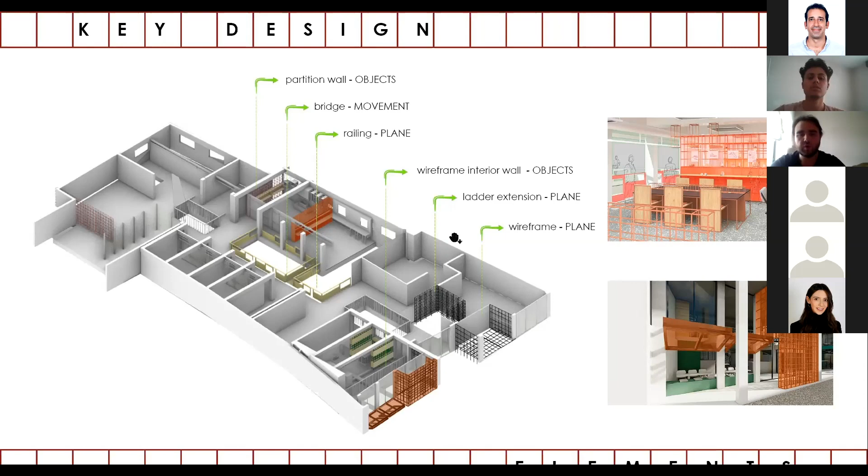Here is the diagram of the first floor, highlighting major proposals. Again, regarding the area in close relation with 937 Street, a special zone is proposed on the first floor, in continuity with the tribune for workshop and artisan production.

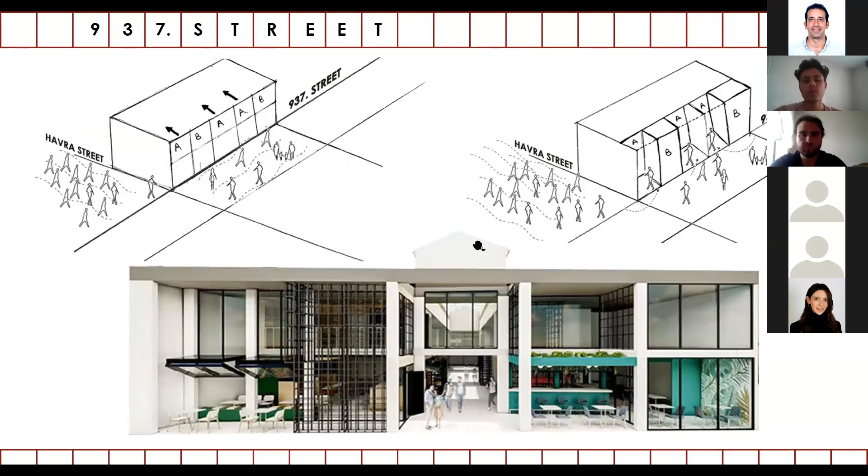This perspective view shows the new relation proposed by the project between indoor and outdoor spaces of the building along 937th Street. The idea is to integrate into the boundaries of the building activities generally occupying the public street, aiming to ensure more intimate opportunities for social interaction and consumption.

Here is a view from the cafeteria located on 937th Street, showing in the background the access to the main inner circulation corridor of the building, the passage itself. Again, a space in between, belonging to the building but also oriented to the street.

Now we want to introduce the second focus of our project proposal: the creation of a special cluster of commercial spaces, workshop areas, and social interaction located along the major circulation axis of Albayrak Passage. This axonometric view shows a portion of the building, the one affected by the redefinition proposal.

The elimination of a commercial unit and the demolition of a portion of the first floor slab allows the integration of a limited size tribune, meant as a social gathering point for building visitors, which becomes at the same time a major vertical connection element linking to the first floor, where spaces for informal working, workshops, and artisan production are located. The idea is to simulate the spontaneity of an urban street, creating the passage as one of the patches composing the environmental variety of Kemeraltı.

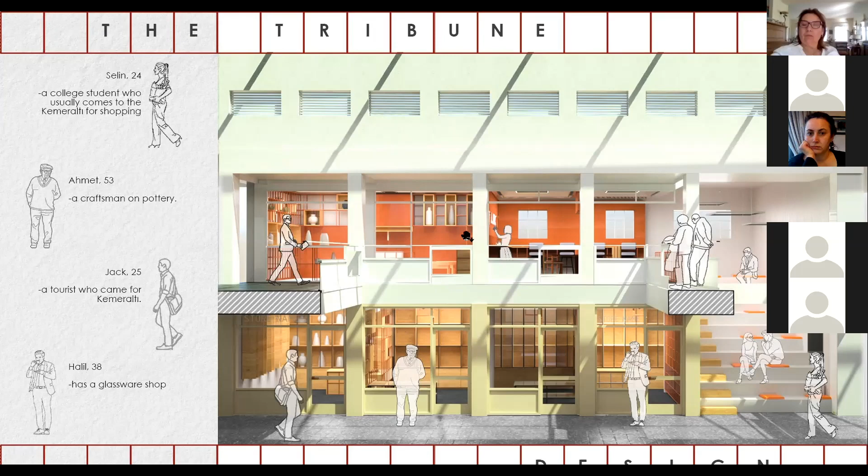We want to highlight the fact that a mix of spaces having different character and use will ensure the attraction into the building of a new pattern of user profiles, extending the current perception of the building and stimulating new future possibilities.

This axonometric view, showing only the ground level of the tribune zone, shows our proposal for the extension of commercial units. The idea is to pair spaces in order to offer larger commercial units, consisting of a sales space, the showcase of the shop, and an additional independent space for artisan production, which will also offer visitors walking along the central corridor the view of craftsmanship activities.

Here is a closer view of the commercial unit proposed by the project with the doubling option. Lightweight metal frames will characterize the interior design of the shops and ensure the partial isolation of sales and artisan production spaces, in a way reminding of the old furnishing elements characterizing former shoemakers' shops.

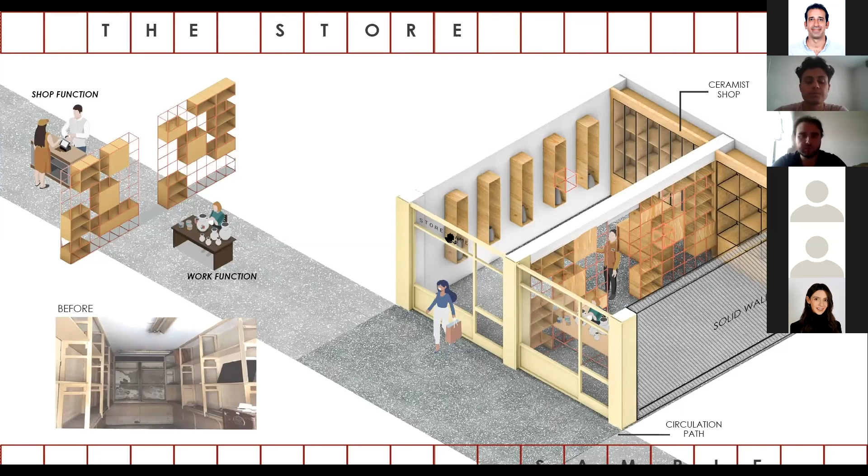Here is a picture of the current state of the storefront of the shop located along the central corridor of the building.

And here is another view of the shops and tribune. Now we will move to the upper level.

This perspective section shows the vertical relation established by the tribune as a way up from the central corridor of the building to the upper level, offering at the same time an informal solution for social interaction and individual permanence in Albayrak Passage.

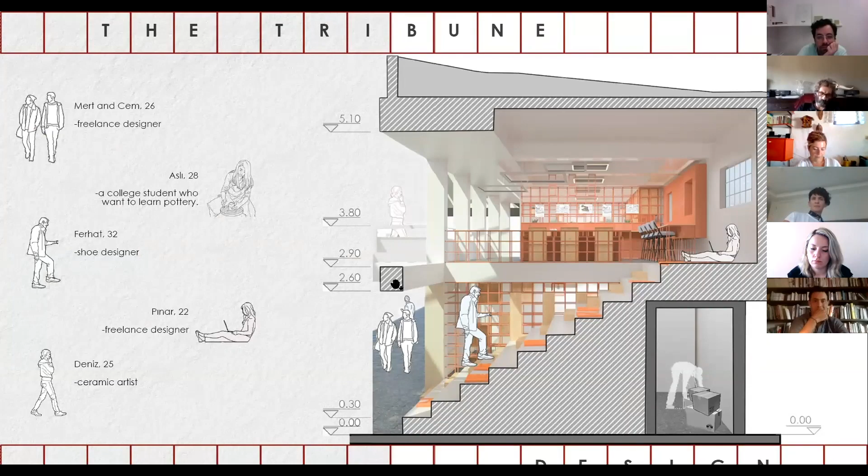And this is the view from the arrival landing of the tribune toward the workshop and informal working area.

And here is where our journey throughout our project proposal ends. Thank you for listening, and we will be happy to hear your comments and to reply to your questions.

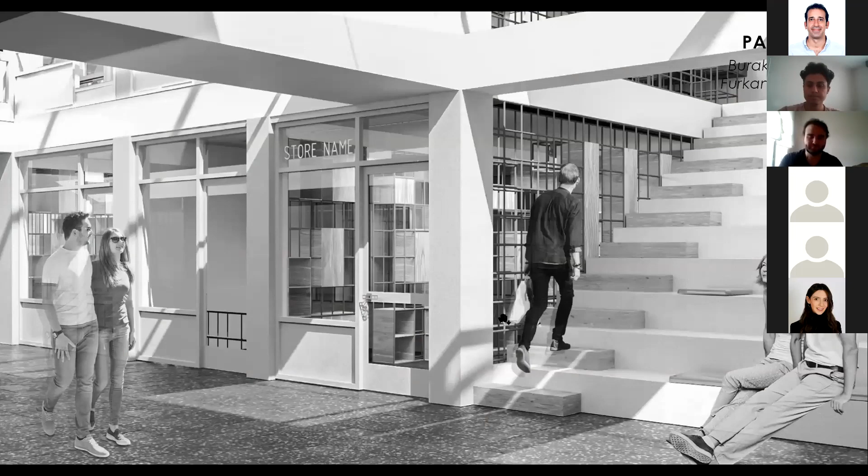Yes, thank you, Furkan. Thank you, Burak. I think this was a different approach, much more - much less, let's say, dominant. But I would like to hear a few opinions, if any.

I have a little comment. I liked your approach of recessing the facades and integrating the street into the interior space. It's a very good approach, I think. It also makes the passage more welcoming and more integrated with the local community users of the space. I congratulate you for this. I also liked the integration of the furniture with the spaces - your furniture pieces are so effective, and they also work as building systems. Congratulations, and thank you very much for your good comments.

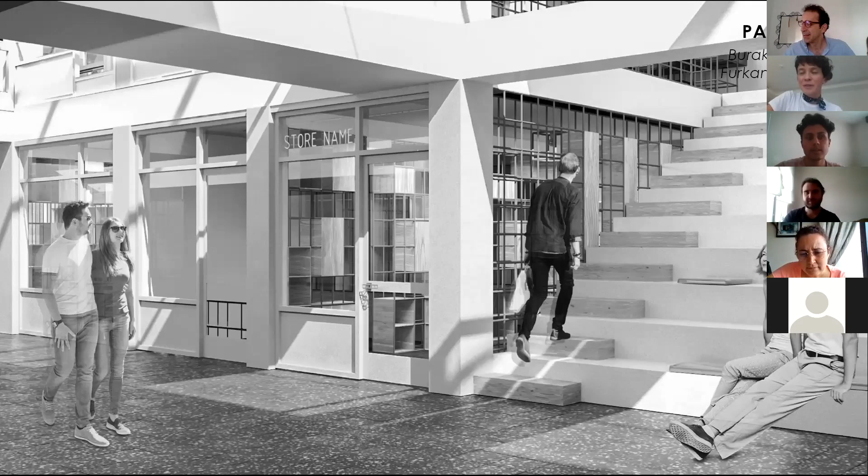I would also like to say congrats about this project. It was a simple idea, but more humane. These students wanted an honest approach. For me, it's not about technology or high quality, but being closer to people and human relationships. And I like it. Thank you.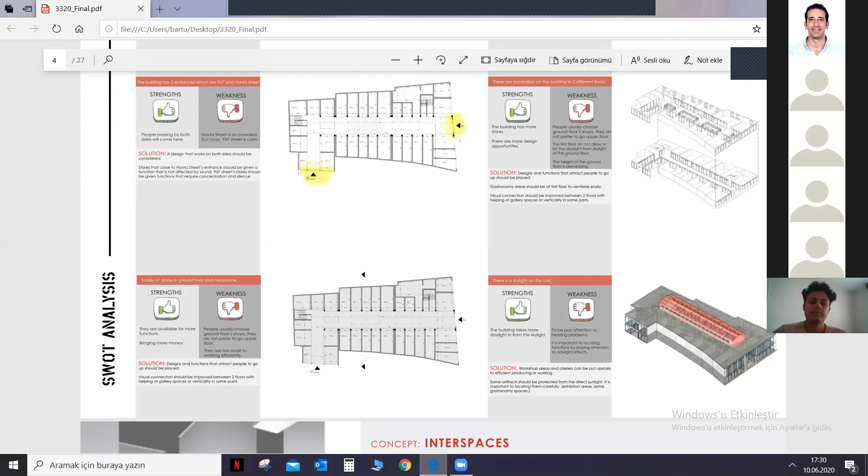In this slide, we wanted to summarize some results of a SWOT analysis we conducted as a preliminary step to support the project proposal. We consider it a strength that the building has two accesses and therefore two elevations open to different streets. One of the major weaknesses is the size of individual commercial units. We must remark that the building consists of 61 commercial units, each with very limited internal dimensions. Another weakness may be identified in the fact that commercial spaces on the ground level have better visibility compared to those on the first floor, although the upper level has greater natural daylight and ventilation.

Interspace: the interspace connects the two main spaces. Passages are also defined as interspaces of their location. It gives people an opportunity to transition, while at the same time allowing them to experience. Albayrak Passage is an interspace connecting Havra Street and 937th Street. The aim is to create an interspace that includes memory, transition, and experience. When people walk through the interspace to cross the main space, they can experience the feeling of transition and the cultural intersection by themselves.

Our design strategy aims at proposing key interventions that will impact the general system of circulation and social spaces, while at the same time merging some commercial units to provide wider spaces for future businesses. Moreover, promoting the permanence of the memory of the building, the story of shoemakers who once had their shops here, is a key aim of our project.

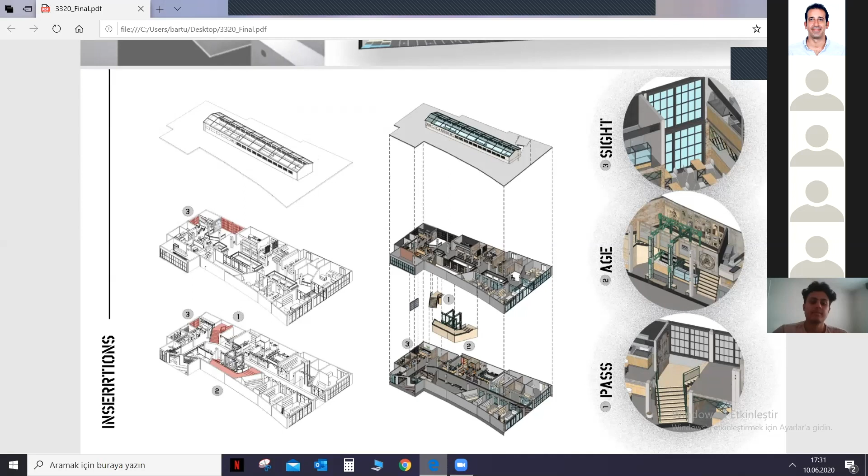We have categorized our proposals by referring to three different aims: Pass, for the modification of the circulation system; Age, for interventions aimed at creating a memory timeline space within the building; and Sight, for interventions aimed at establishing visual relations with the surrounding areas and buildings, especially with the Jewish cultural heritage clusters.

Here is a three-dimensional description of our design strategy with the indication of the proposed building program related to Pass, Age, and Sight. The Pass zone, due to its spatial relation with Havra Street, consists of gastronomic spaces for street food. The Age zone again consists of gastronomic spaces, but moves from the concept of street food to traditional food. And the Sight zone consists of artisan shops.

In this slide, we want to highlight that the main focus of our project is on the vertical circulation of the building. Our proposal intends to redesign all stairways by relocating those within the building. Stairways will have a more visible position and they will be larger in size. Moreover, they will integrate other relevant features such as the visual connection with the outer space and building.

Another important aspect of the project is the verticality of artisan shops, where spaces for sales and spaces for production belonging to the same business are located on different levels and internally connected. This way, sales and production are taken under one roof with the aim of involving visitors in the total process of creativity.

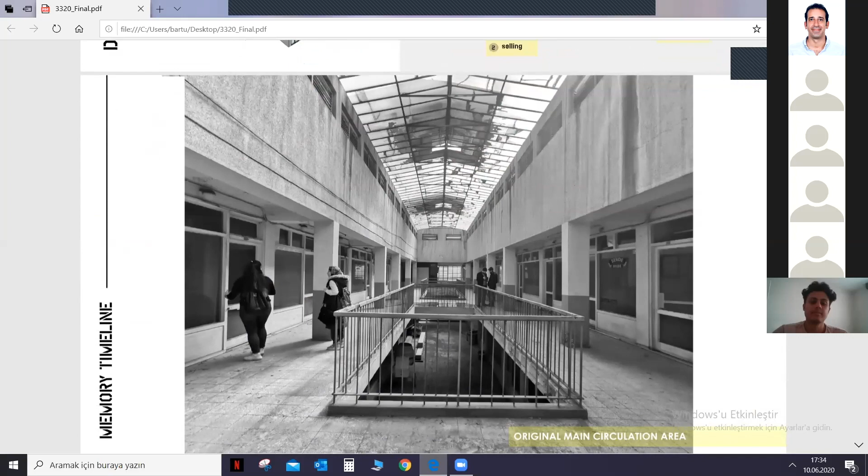This image shows the original character of the passage. This perspective view shows our proposal for the vertical connection space.

On the first floor, as the border of the memory timeline, we intend to reuse original vitrine timber frames for the creation of a transparent partition that will ideally represent the past and at the same time isolate the space for the memorial journey. Original shop labels will be kept in order to address all old enterprises.

A collection of original pictures will be reproduced and displayed on the surface on the major wall enclosing the stairway connection. Here again, the idea of the frames comes to support the proposal, a sort of duplication of the original vitrines to allow introspection within the fictional space of old shops.

Memory is a relevant aspect of this semester project and a complex design problem. This is the way we are proposing to integrate memory into our proposal, by considering the reuse of valuable features of the building and the creation of new meanings.

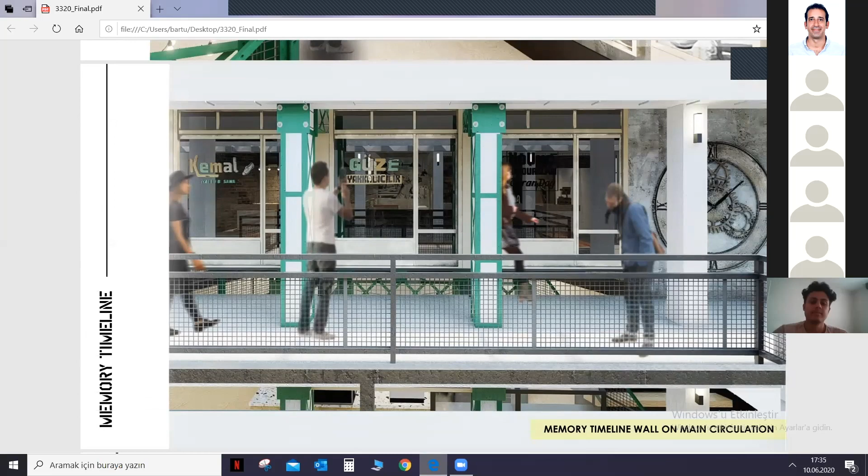Here is a perspective view of the ground floor major circulation axis. On the right, you can see the memory timeline stairway enclosing a cafeteria. On the left, a sequence of spaces for gastronomy, and on the background, the access point from 937th Street.

And here is a perspective view of the first major circulation axis. On the right, you can see the memory timeline stairway, enclosed by an installation made with original vitrine frames of Albayrak Passage. On the left, a sequence of spaces for gastronomy.

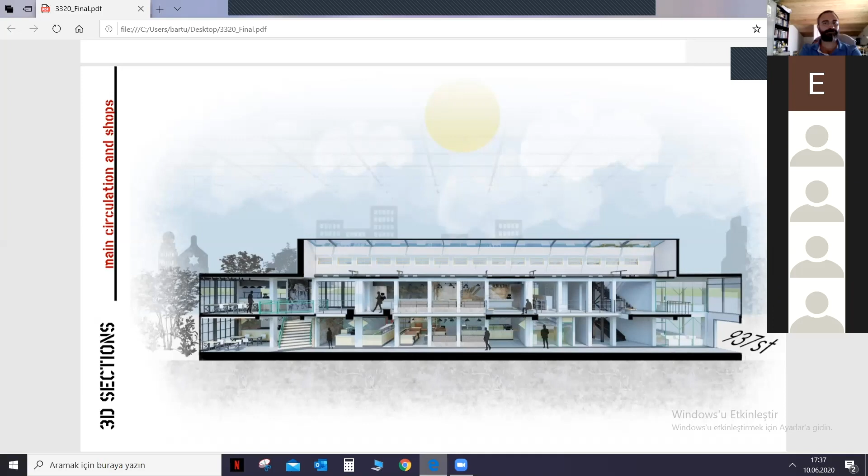This perspective section shows the longitudinal axis of the building in its new view. On the right side, the entrance from 937th Street and the third stairway of the project. Centrally, a sequence of spaces for gastronomy, and on the left, areas for consumption and social interaction, where through large openings a great visual connection with the building surroundings is proposed in order to integrate existing values of the region.

This perspective section shows the cross view along the central axis. On the left, the memory timeline stairway and the cafeteria enclosed by it on the ground floor. On the right, spaces for gastronomy located either on the ground and the first floor. And centrally, the two levels of circulation of Albayrak Passage with the longitudinal skylight running above those.

This perspective section shows the cross-axis of Albayrak Passage as originating from the entrance gate located on Havra Street, visible on the left. Along this axis, a sequence of spaces for gastronomy and consumption are proposed.

On the upper floor, a large cafeteria space overlooking the garden of the Synagogue. And on the right, one of the major stairways proposed by the project, representing the focus point for visitors entering from Havra Street and offering on its way up a wide view towards the Synagogue district.

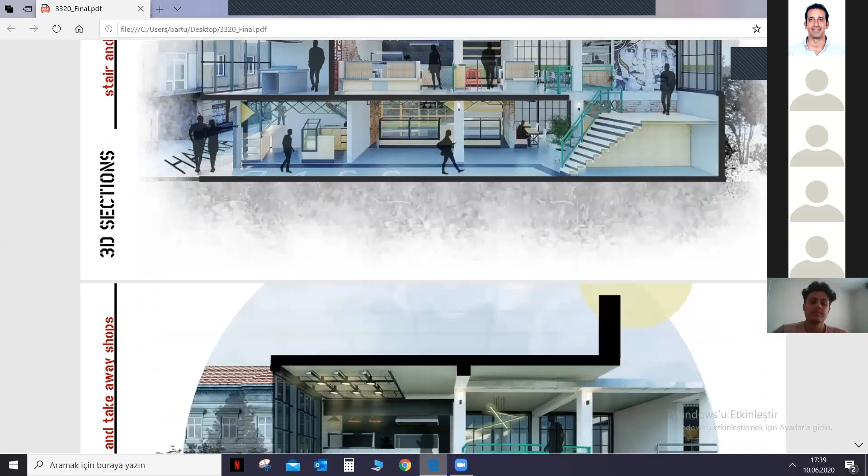This perspective section shows from another point of view the intersection of circulation axes in their L-shaped configuration. On the left, through large openings, the project proposes to integrate the view of the Jewish heritage district into Albayrak Passage.

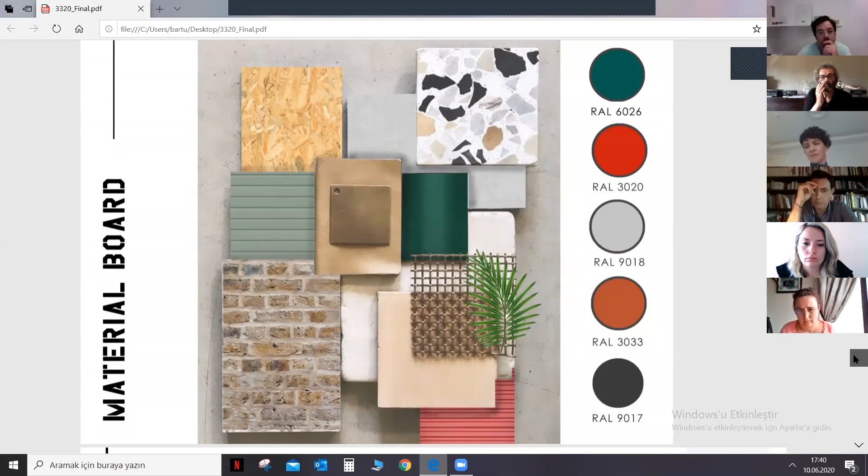This render shows our proposal for the redefinition of the boundaries between circulation axes and shops, in this case gastronomy spaces for street food and local products. A suspended grid system will mark the threshold between the areas, integrating new levels for each shop. A combination of metal frames, plywood panels, and exposed wall surfaces will ensure a modest general appeal.

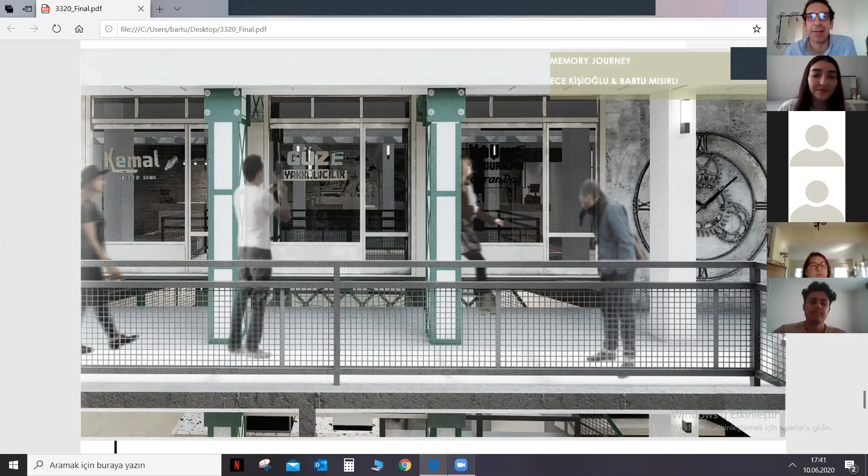Is there any comments that you can say? For now, there's an ambulance. Yeah, sorry, I hope that's not a comment. Anybody has some energy still left?

So I would like to make some comments. Can you hear me? Julia, yes, well, welcome. So, thank you for your presentation.

I would like to say that I like the way you introduce the old elements connected with the past. Unfortunately I don't know the building place, but from your presentation, your concept, your project, I feel that I can also meet the history, not only the original modern project, but also learn something about the past of the place. So I like it.

Yeah, we mostly want to show the historic side of the building, so that's why we want to keep the memory timeline, design in the middle of the building. Yes, and I think that I find your interpretation interesting. Thank you so much.

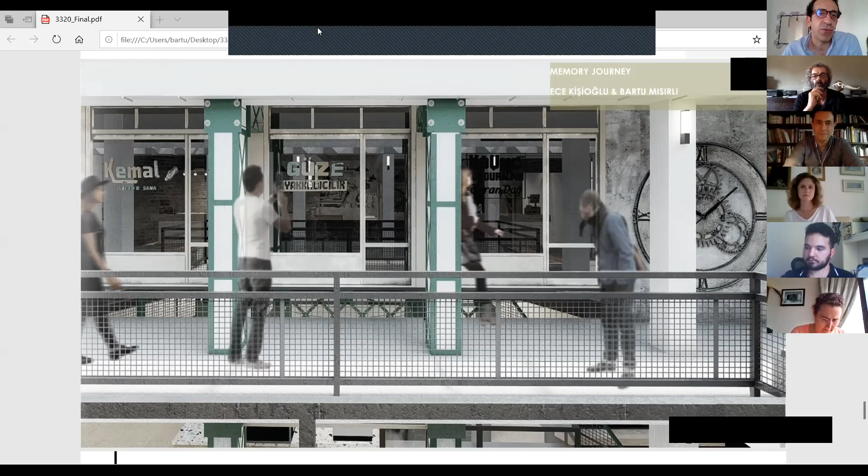Establishing a dialogue, the same way you define your project, but now through physical elements, through architecture. It would not be a dialogue in religious terms, but of course it's possible to acknowledge the existence, and there might be negotiable ways to do so. It has to be discussed and defined together. But introspection is a way of bridging, not to spy.

This project, as many others, proposes what probably defines it more is the interest of giving shape to memory, not in a spectacular way, but just by reusing what is already there to become a new way of proposing something old into a contemporary way. That makes this project valuable, probably the one that addresses memory in the most consistent and physical way.

Yeah, I saw the effort to establish a dialogue with the environment and mainly with the synagogues. But here in this work, that dialogue was also there, but it's not only dialogues.

It's the Jewish district, and here it has its own character. I would love to sit in one of these shops that says Kemal Shoemaker or Güzel Shoes and have a coffee or eat a spaghetti or pide, whatever. That would be fantastic. Great work, thank you. Or maybe a kosher shop, why not? A Sephardic restaurant. Yes, exactly.

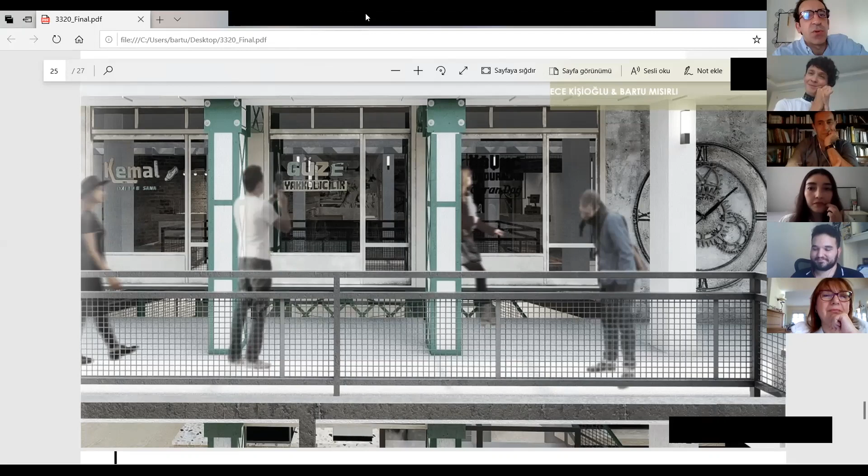Yeah, maybe I should give an answer to this, because it was intentional—not intentional the quantity, but intentional to promote a sort of test. What if the building does not have a typical 9 to 5 time? What if the building is not only a commercial place? What if the building can turn into a clock, working together with the hour, and promoting unpredictable intersections between people having different aims in visiting the building?

So the idea was, let's consider first where we are and how intense the life around the building is, and how much tourism can also be affected by new projects happening around—the Jewish project is one of them. So what if the building becomes simply an urban route, for people just to pass through? And then the idea of the terraces came up for many projects.

What if the building keeps commercial activities, but of course gastronomy is probably overused in Kemeraltı right now. But still, there must always be a sort of minimal offer to promote permanence into the building. What if the building has commercial units but promoting artisan works and craftsmanship? What if it's not only a showcase but also a production place, so people would establish a small atelier into the building? And what if we can also have different users coming to the building, for example to join professional or semi-professional education?

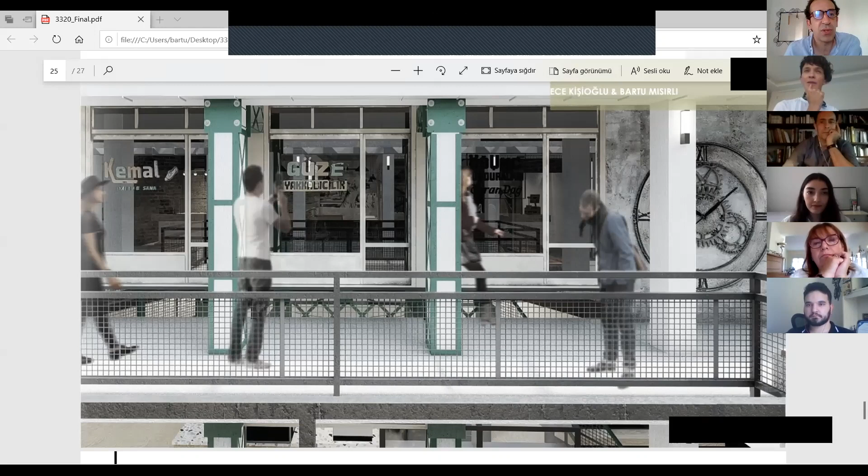What you have seen today—actually now we can really take the conversation to a general level, not only about this project—is, let's say, genuine, but of course supervised by all of us. In the team—this is a very good team—Ebru and Özge, they come from conservation studies. Fulya and Burcu, they practice interior architecture. I'm an architect, bridging the two things together. So we don't have high-tech experts in the team, and that is visible.

So there are several aspects about technology, they are also important. But when we try to manage everything at the same time, results might be incomplete in one way. So we wanted to reach at least one target, which is the awareness of the importance of history, and that should never be limiting—it always requires an interpretation. What you have seen are all spontaneous, semi-spontaneous, always refined and filtered by the instructors, by the semester, by the visitors, by the contributors, by the experiences, and by the lockdown also, which was very much affecting this semester's education. With the project online, it was something absolutely different.

But maybe increased concentration. People were obliged to be at home, so maybe they have been spending more time thinking. So what you have seen is a variety, and we wanted also to see where they would go in relation to this input. I think this is a perfect challenge, by the way.